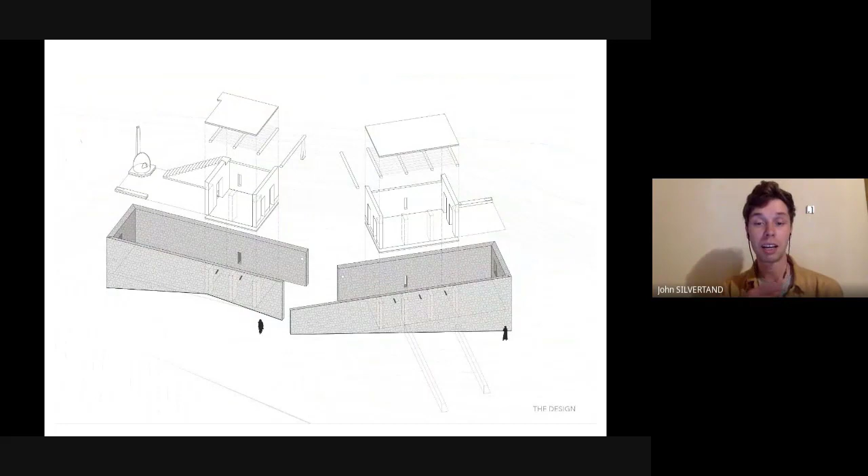This is the building that we realized during the second semester of the postgraduate. We built the project during an 8-month period abroad in collaboration with the local workers and with help from the women. The community chose a place for us on top of the hill in the center of the village, so that the project would have a connection with both the north and the south part of the village. The women asked us for 2 different places to meet, an atelier and a kitchen, and the building is kind of a place where the women can come together, but also where they can share their crafts with each other and with visitors.

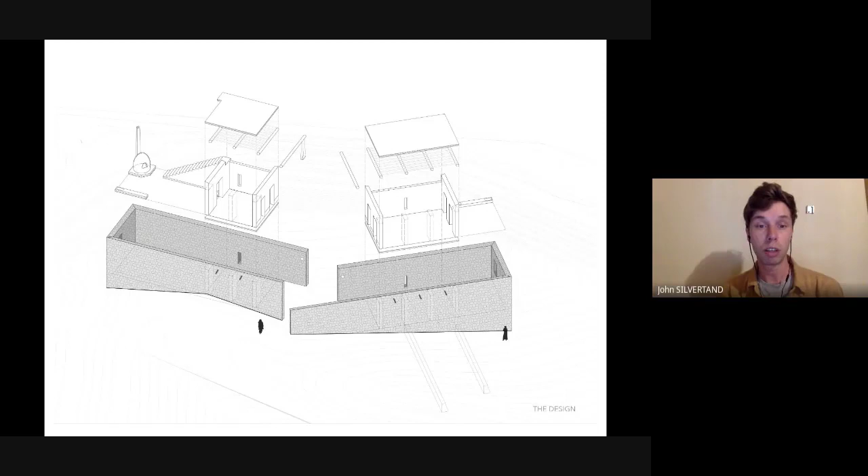The design of the building is really quite simple. It is one project, but it's also 2 buildings, which are connected by a semi-public space in the middle. The 2 volumes are designed as sort of a granite envelope in which the interior space, the kitchen and the working space are placed as a volume, which creates an intimate garden in the back.

One of the most important things from the design is that we try to start from the local materials, such as the granite from the exterior walls, which is super local, knowing that we are working on top of the mountain. And besides the granite, we used all natural resources. We also worked, for example, with adobe bricks, with local wood for the roof, reed from the palmeraie, and we used earth-based mixes for the walls and flooring.

What's really nice is that during the construction period, we worked really closely together with the local craftsmen of the village. We worked together every day on site, and the building site itself became sort of an environment where there was room to do experiments and do tests with the local materials. And in this space, we really learned a lot about the materials and also from each other.

Something we also tried to do when we were there was to involve the women in the construction process. We did this by organizing workshops with them in which we focus on certain details of the building. Like, for example, they helped making the design of the interior. They made curtains and carpets, but we also built together with them the oven on site, and they also helped building the forest garden next to the building.

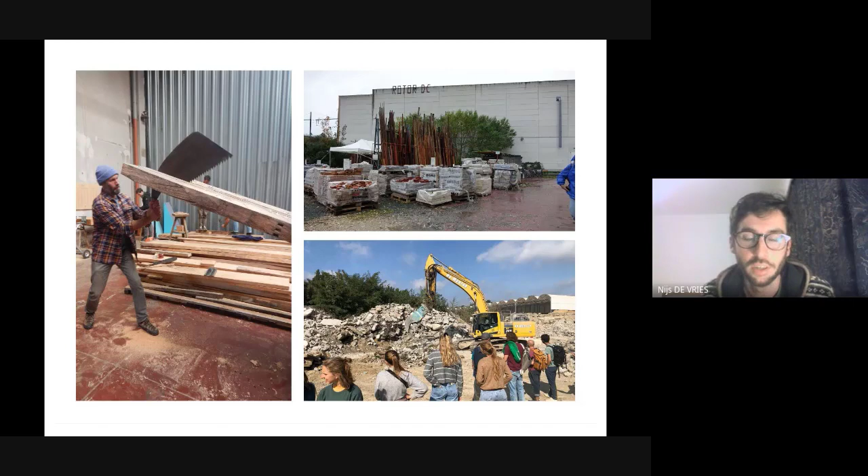So this year was in the theme of regenerative building materials, and it was about 3 types of materials in the city of Brussels. So the first one was wood from local forests, like the Sonian forest just outside of Brussels. Reclaimed materials, we worked together with Rotor, a reclaimed material shop in Brussels, and also earth from construction sites, also from Brussels. So these are the three main topics.

And the postgrad is divided into 2 semesters. The first semester mainly aims to get the theoretical basis. So we had a lot of lectures, a lot of discussions, but also some workshops so we could get some hands-on experience. But mainly what we did in the first semester was to plan for the second semester, because we were planning not only to make

The second semester was more in the theme of really building. So if you go to the next slide, yeah. So in the second semester, we started to get our hands dirty quite literally, because we got some earth from the city of Brussels. We transported it to the museum in Hasselt, and we made bricks out of it. So first we made bricks inside of the museum, and then out of these bricks we made pedestals.

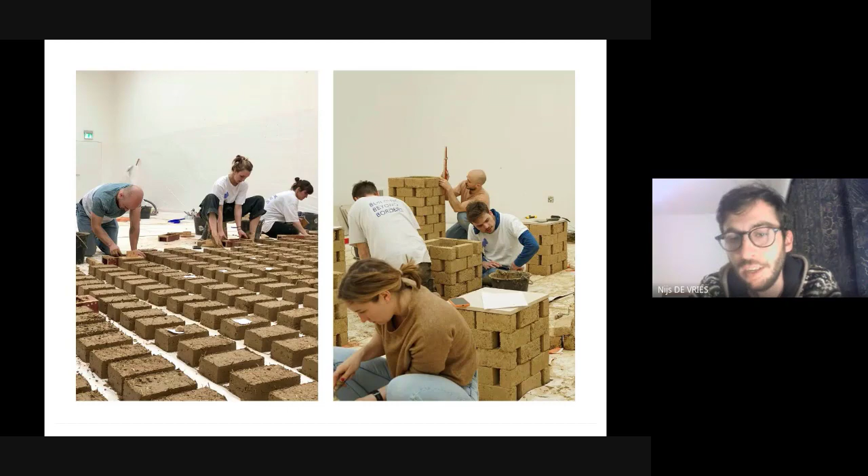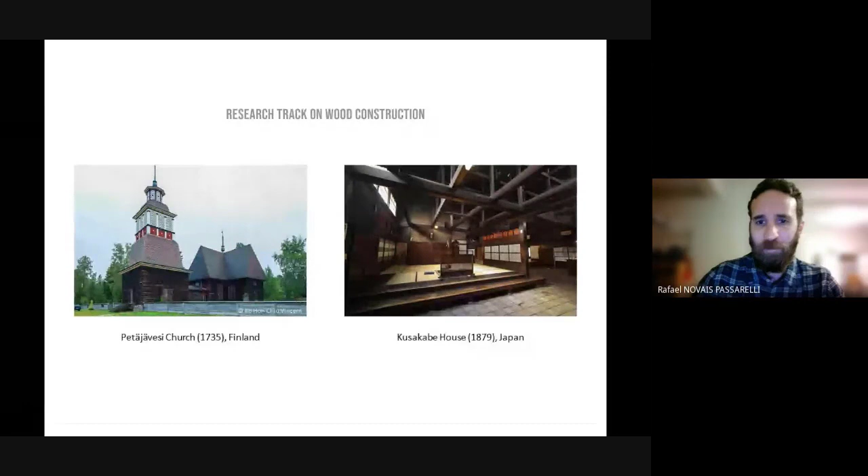But the fact is that there is now a completely new range of application possibilities for wooden architecture and wood design. And with those new applications, there is also a pretty different range of expectations that comes together in terms of design, construction, and performance for these buildings and how they relate with their environment. And this is certainly something that we will discuss.

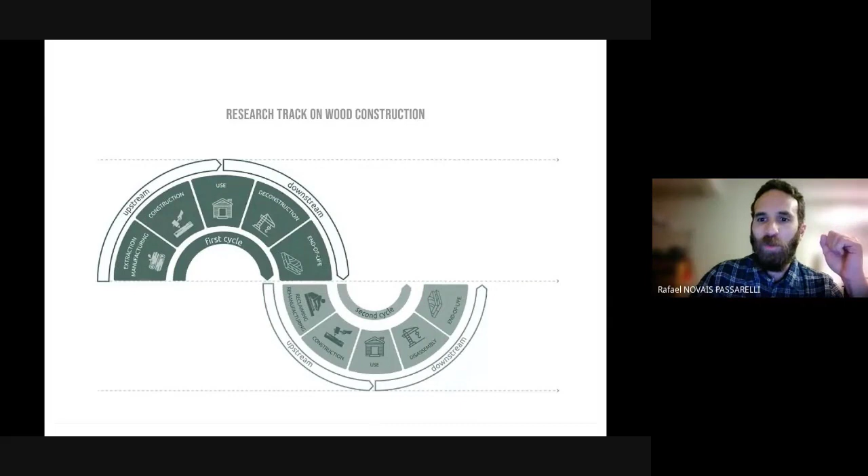Now, we are all kind of responsible people with sustainability-driven minds. So even though we are using renewable fiber-based materials, we want to be very precise, and we want to be very economic with our needs for extracting new resources. So as you have heard, in this track also you will be working with our talented researchers in the framework of our ongoing research projects. And right now, we are trying to work on the possibilities of designing for the disassembly and the reuse of wood components.

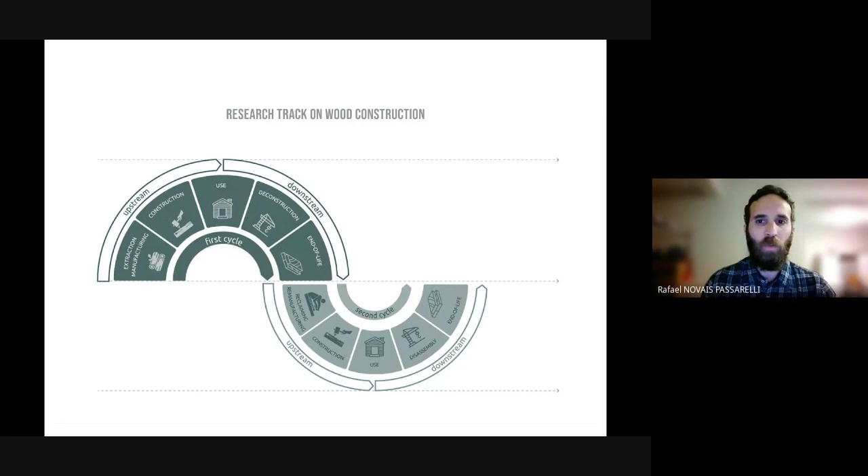So basically, we are trying to understand the challenges that are associated with reclaiming wood-based materials from one cycle and trying to apply them again in the next construction cycle to keep the materials in the loop. And also, when we do that, we can design in a way that makes it much easier in the next cycle to do the same with less effort, less losses, and so on. So essentially, we're trying to connect those two different cycles as one continuous flow of design thinking. And that's more or less it in a nutshell.

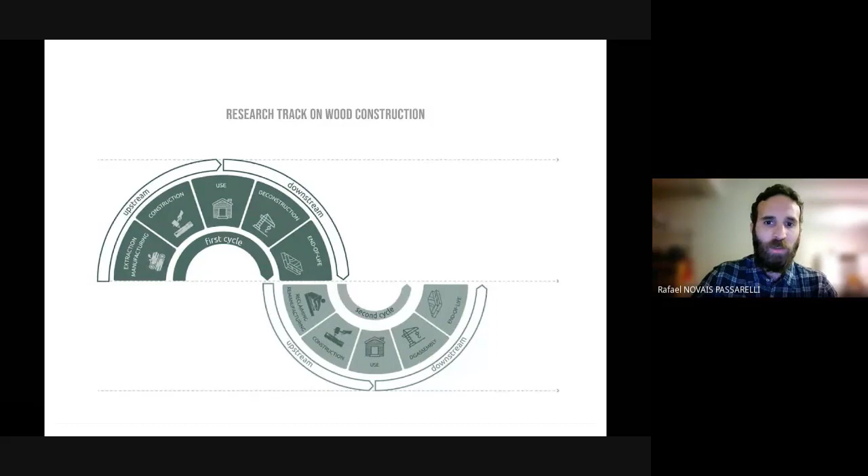So in our last research track, the social and participatory design track, you will work closely together with the spatial capacity research group. They have expertise in supporting collectives of citizens, but also local organizations, local governments, in reflecting together on spatial transformation processes. And Liesbeth Huybrechts, who will guide that track, has a long-running research project in the community of Helchteren, where we will design and build our building project.

And in a participatory way, we will design and build the intervention there. We will interact with the end users on the use of earth blocks, and we will try to create awareness on other ways of building with a lower impact together with them. And so there we will realize our project.

So I'll give you a little introduction on the idea of the hands-on ateliers. So we really find it important that besides the theoretical courses and your own hands-on project later on, the real building project, that we feed you already from the start through the different topics of, for example, geo-based construction. So here you see a picture from our new location at BC. So this is a bit what I do daily at BC Studies.

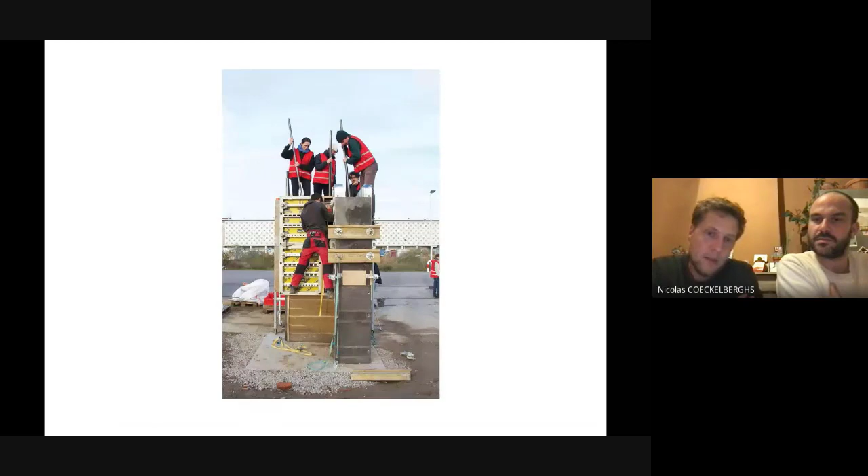As you see on the picture there, it's a rammed earth tiny pavilion, but enough to give us an excuse to really get to know the material first hand. On the next slides, though, you see another topic that rises up. Yeah, and this topic is actually more going towards this research track where you will be working on earth blocks.

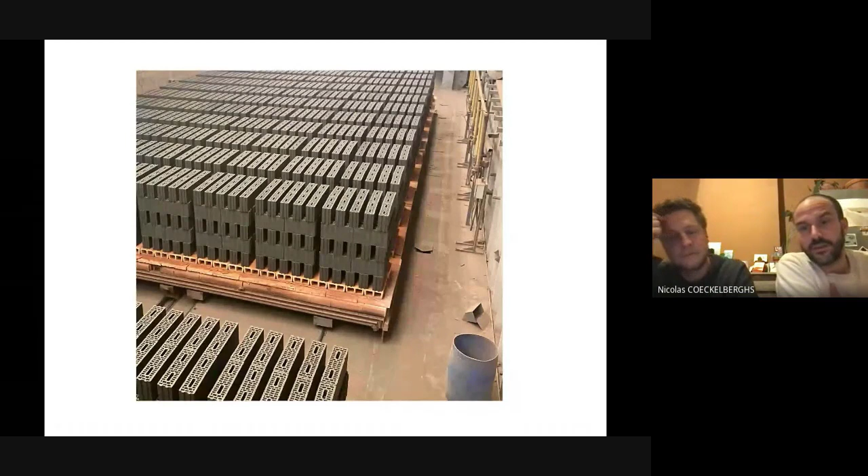And so basically during that workshop week, we will be visiting different projects, but also different factories where they produce earth blocks, well, fired earth blocks or compressed earth blocks, fired blocks that actually have the potential to be unfired. And so this whole concept of working together with the industry, but changing the industry that is used to build with fired or with cement to make concrete blocks, in order to change it towards more earth blocks.

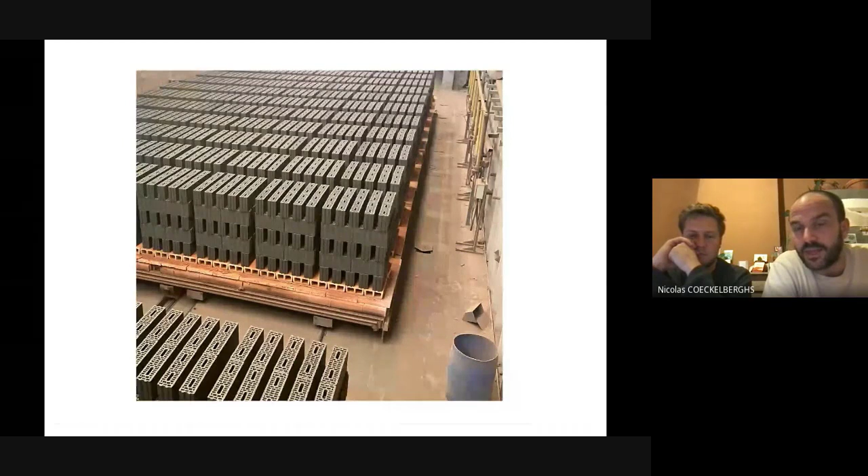So here during this workshop week, we will be looking at the potential to use the industry in order to spread and to have a bigger impact and to have cheaper materials, but on the same hand, enhance also the craftsmanship of earth, working more with and discovering rammed earth, and seeing those two earthen building techniques next to each other, in order to see what is the difference between enhancing the craftsmanship and the industry that has this potential of making earth affordable for everyone.

So it's a very, that's the baby phone ringing, but it's off very soon.

As a very hands-on way, so that means in an artsy way and an artisanal way, but also understanding where the material comes from.

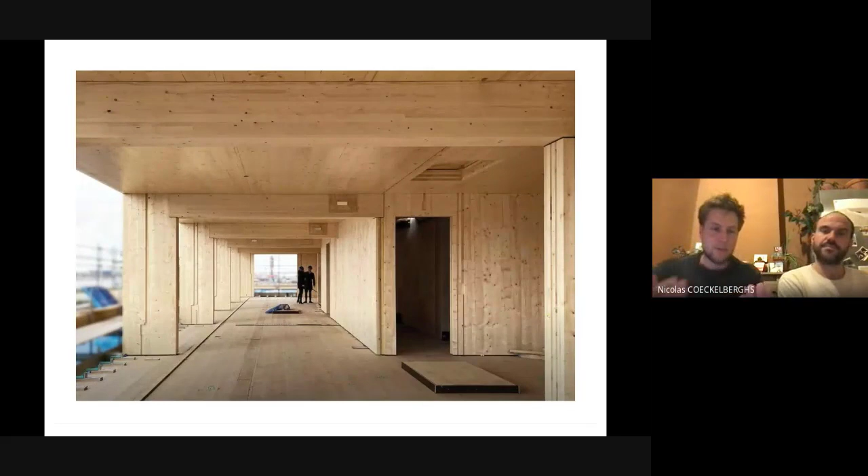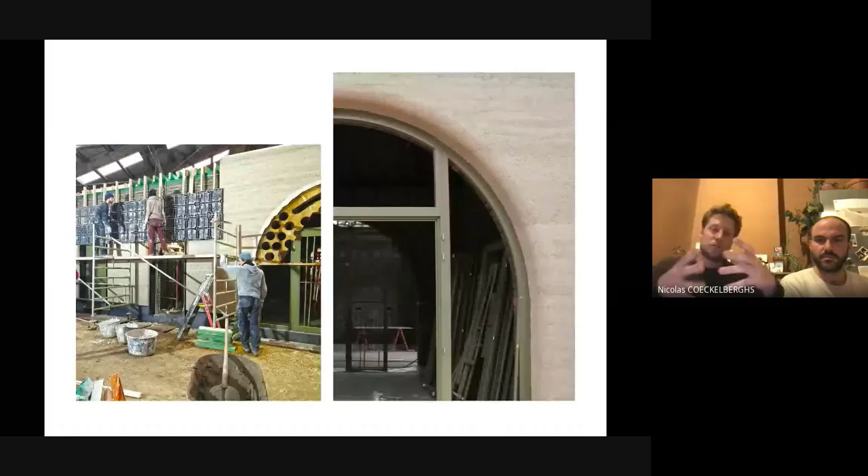The next one is another example of that. It's again bio-based materials. So here you see hempcrete. So that will be another workshop where we really focus on fibers. In this case, it's an insulating material. The pictures you see, it was a workshop that we did on a building of BC in Antwerp, where collaboratively the hempcrete was placed as an insulation material. So that's the other family branch of materialities, again, fibers or bio-based materials.

The last one here that we have is the workshop in Morocco. I've seen in the list that a few of you guys were there quite recently. We did a workshop as well last month in the village where the project that John presented, the Woman's House, took place. And what's really interesting there is that we do not have to explain these old techniques of earth construction, as we call them, as old. There it's just very nowadays. They still use it nowadays.

So the whole context and intercultural exchange we found more than relevant enough from the first edition to also take you guys there for a small 2 weeks. And not only will we have the chance to work with the local craftsmen from there who still use the technique, we also think that it's just a nice occasion to be there together with the whole group. You will be halfway the second semester, so you will have been reflecting already quite a bit on your building project. So it's a really nice place where you get a chance to stay with the local families and to understand how they are still looking at those old techniques and how relevant they can still be today.

And I can maybe also say for the ones that have already been there, that the focus will be different in the sense that we're going to be focusing here on earth blocks. That's actually going to be a red line that will go through the whole program. And so I think we will also go to Marrakesh in order to visit an earth institute that is specialized in adobe blocks. So that's going to be, I think, a nice focus to see how earth blocks can be used in a contemporary, but also in a vernacular way, and in order to add some potential to our projects that we will build together.